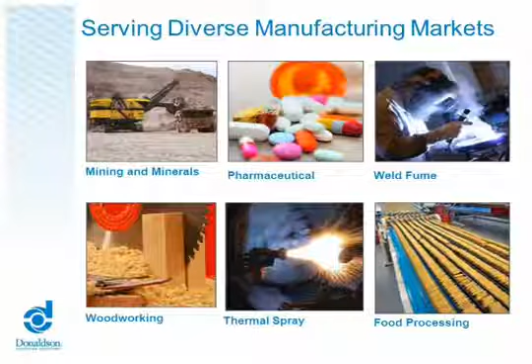And what kind of markets are you in? Well, the markets span from metals and mining to weld fume, to thermal spray, food manufacturing, and it goes on to abrasive blasting, cement and minerals, foundry, glass, and the grain industry. Today we're going to focus on the grain industry, a small segment of what Torit does.

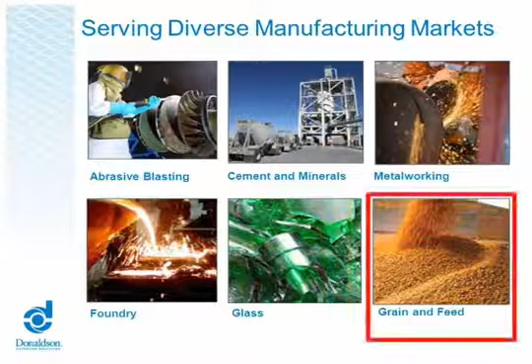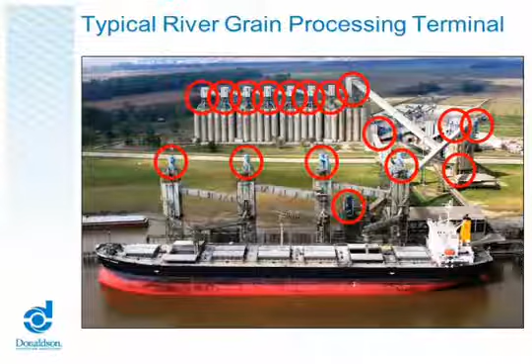Can you give me a few examples of typical applications? Well, as grain moves from the field to some eventual manufacturing site, it's handled many different times through different processing facilities. As you might imagine, when grain comes out of the field, it's dusty, it's full of chaff, it has a lot of material on it that's really not a part of the grain that's used in food manufacturing or feed manufacturing. So as that grain moves around, it's very dusty. And so as it goes through the facilities, that dust needs to be controlled at every point that the grain is moved.

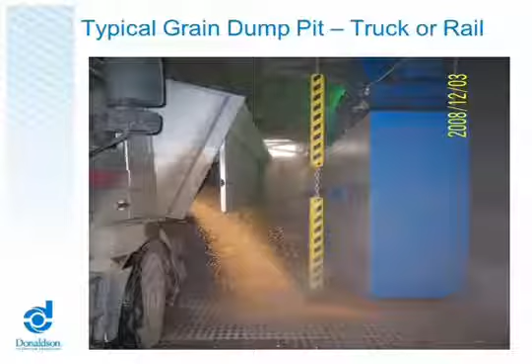Where does the grain actually move from? Well, the grain goes from the field onto a truck, and the truck will go to a grain processing facility, or the grain will go to a train, and then the train will go to a grain processing facility. And so as the grain takes that initial dump out of the truck or the train, a huge plume of dust occurs. This little jar here is a representation of typical grain dust, and I don't know if you can see it, but it doesn't look like grain at all, but it's very, very dusty, and this is what we handle.

Okay. And how many Torit units would be dealing with that? Well, it varies by facility size, but essentially anytime the grain moves from point A to point B, there has to be some form of dust control on the unit. Okay. And what does the traditional solution look like?

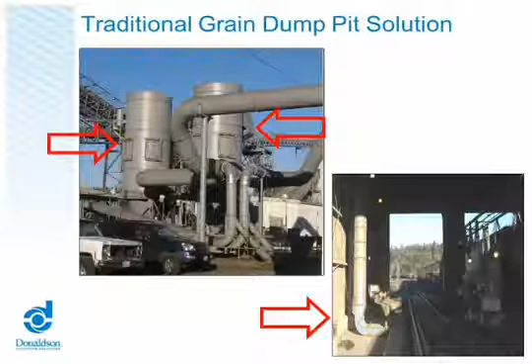Well, the grain industry has been deploying an age-old baghouse type technology for the last 40 or 50 years. Donaldson Torit participates in manufacturing and delivering those units, and over the years we've perfected the design of our units, but they've really gotten to the end of their life cycle in terms of being able to make them more beneficial to the customer. So the older units are very large, they consume a lot of steel, have a tremendous amount of filters in them, they're expensive to ship, they're expensive to erect, and they're attached to large, long ductwork systems that attach to all these different processes in the grain facility. So that also requires a tremendous amount of horsepower for the fan to suck air from the manufacturing facility through all of that ductwork, through our dust filter, and put clean air to atmosphere.

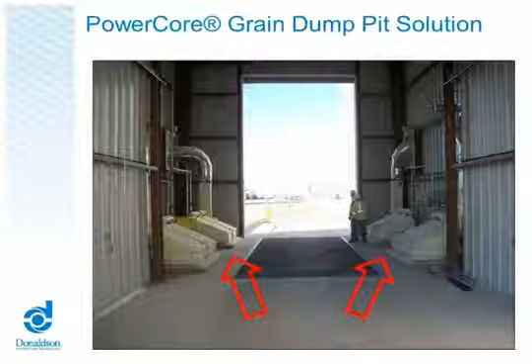So you mentioned the old technology. How is the new technology different? Well, much like the rest of Donaldson Company, we're deploying PowerCore Technology, which is a new fluted design for our filter media, which allows us to dramatically downsize the size of our filtering boxes. For instance, in the grain industry, the antiquated technology, this filter bag here is 8 feet long. So if you can imagine a bunch of these in one of those large filter housings.

Instead, we deploy our PowerCore technology, which this is a great example of here. This one small PowerCore filter pack replaces 8 of those 8-foot-long filter bags. So as the units get larger in size, you can imagine it's much easier to handle something like this and less expensive than to handle 8 of these. Yeah, the changeouts look like they might be a little easier. Correct.

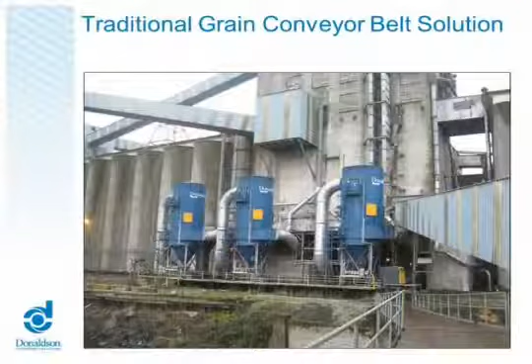So I've seen some of the blue collectors on conveyor systems. How does that application work? Again, traditionally the solution has been the older style units that have been in play for decades now, but we've also been able to deploy PowerCore on those solutions as well. So we go from the large filter houses consuming all of that energy that are on basically 24/7 at these facilities to the PowerCore solution. And the PowerCore solution allows us to put a single filter device on one point of grain movement that needs to be controlled.

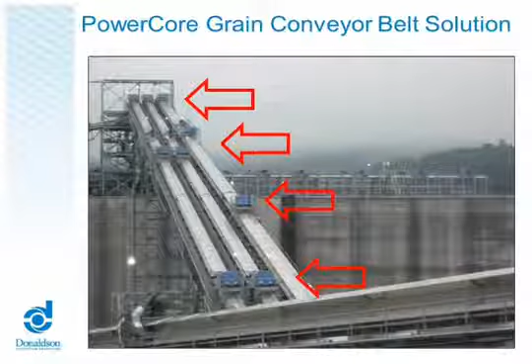So as that grain producer or grain processor then runs line number 1, they can just filter line number 1 and not filter lines 2, 3, 4, and 5. By giving them that option then, they are able to isolate their filtration and consume far less energy by only turning on the filter for the production line that's running for that day. So some nice cost savings. Dramatic cost savings.